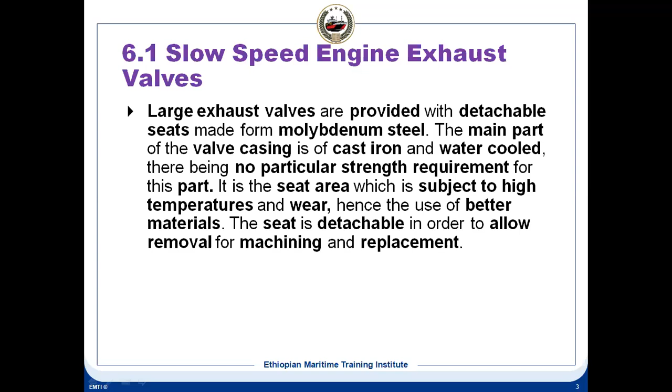Now, hydraulically, we avoid the tappet. We don't use the tappet clearance, so it is hydraulically actuated. But thermal expansion, how has it been taken care of? You see, the thermal expansion, whether you are using a hydraulically operated valve or a rocker, thermal expansion will be there because it depends on the engine operating condition. During the operation of the engine, the temperature.

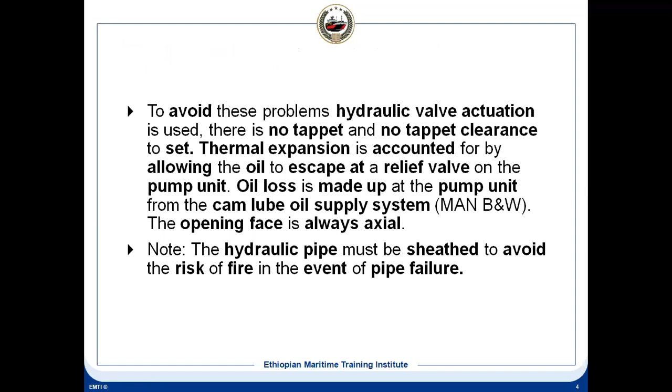Okay, so now can you hear me? There was some network problem. So let us start again. So in this case, can you see the screen? Hello, can you hear me? So can you hear me, all of you? Okay. Yes, Chief, now I can hear you. Yeah, okay.

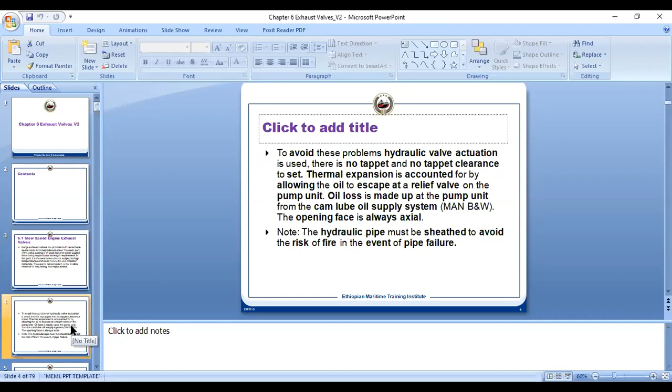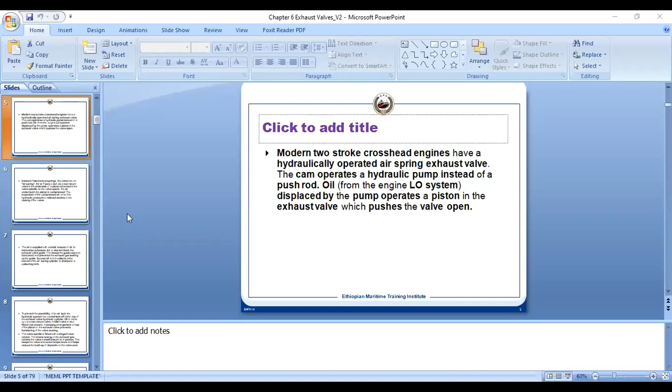Yeah, it is closed by the air spring. So there is an air piston underneath. The cylinder is filled with air, so it gives you an upward force so that it closes. So it is hydraulically opened, and by the air spring it is closed. And the air is supplied from the control air system. It's at 7 bar, and there has to be a non-return valve in the supply line so that when the valve is open and pressure is increased, it should not escape from the air cylinder.

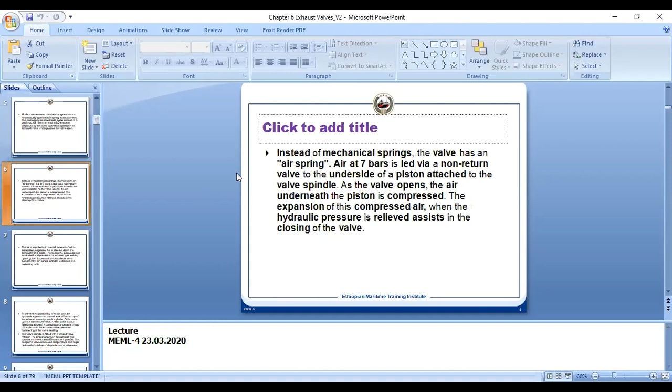Okay, can you see the screen? Exhaust valve. One of you unmute and tell me. Hello, can you see the screen? Chief, you are... no, not now. Okay. Okay, now you can see, isn't it? It's trying. It's trying. Yes. Okay. Yeah.

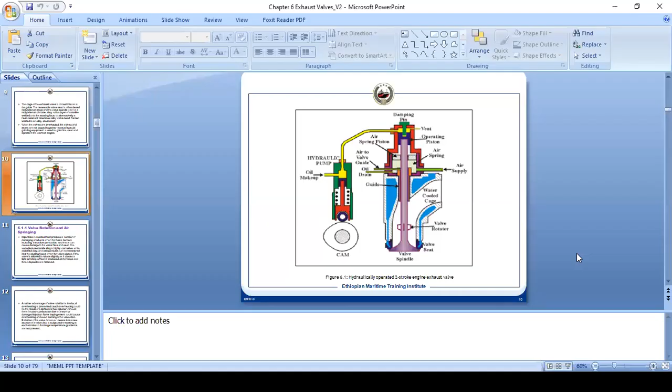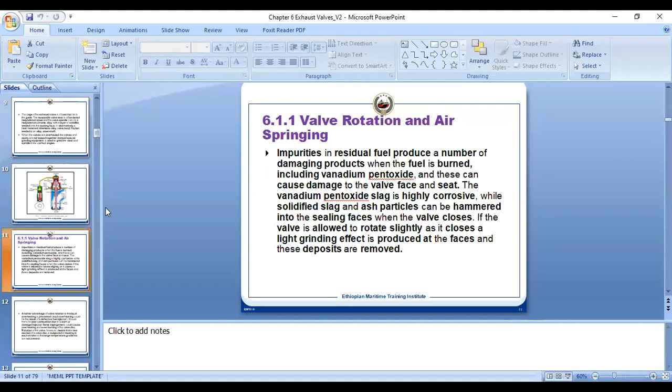I think it needs strong connection. Yeah, tell me. Yes. Hello? Yeah. Can you hear me? Tell me. Hello. Yeah. Tell me. You want to say something? Yes, Chief. The connection is very poor. It's in and out. Yeah, that is true. Let us try now. You just mute all the microphones. So

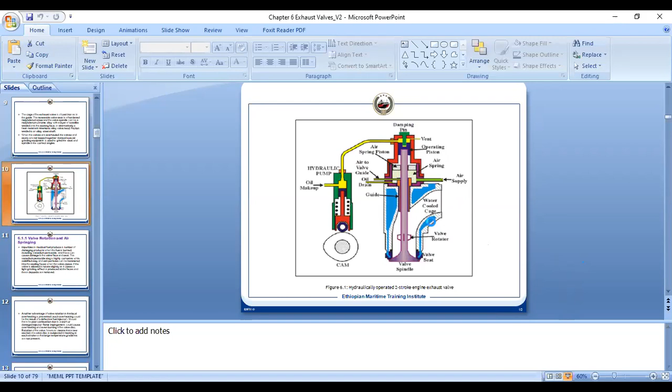In this case, why is the damping provided? Because we don't want it to close faster. If it closes faster, then it will hammer the seat, and the valve face and the seat face will be getting damaged. That's the reason we don't want it.

So here what happens: when it is opening, this damping pin is stationary. The piston, which is the blue color, is moving down. So the clearance between the damping pin and the piston will increase. Once it increases, that space will be filled up by this oil.

Once it is filled up by this oil, now during the closing, what will happen? There will be a slow rate of movement in the upward direction, because this oil has to come out from this space for closing it. So this is the reason it dampens the upward movement of the spindle.

And there is a vent on top. If any air is trapped inside the hydraulic system, it has to be removed, because otherwise there will be knocking, because the air is compressible, so it will get compressed and it will close very fast, which you don't want. And this air piston is moving in the upward direction, because underneath this air piston there is this violet color, what you see is the air cylinder.

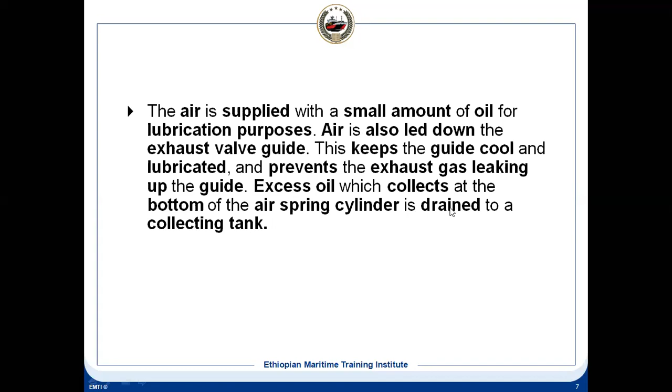So let us go to the slide, the description of it. This supplied air carries a little lubrication oil, so it gives lubrication between the exhaust valve and the guide, because there is relative motion there. It also cools; not only does the supplied air do the sealing, it does the cooling, because there is continuous flow and the inlet air temperature is less. So this is the purpose of the sealing air. And excess oil, as I told you, gets collected and drained to the collecting tank.

Now, this has also been covered. That's the airlock on top of the piston. That's why the vent is provided. Nowadays all engines have auto venting. You don't have to do it manually, as used to be done long back. Because in the hydraulic system we don't want any air, otherwise it will not work. And there should be a non-return valve, so that the high pressure does not get released.

And this is the hydraulic relief valve provided on top of the piston, so that it has the damping effect. So there is no hammering, because as the pressure increases it can release the pressure. The relief valve is not shown, but it is fitted on the pump, not the actuator. Damping is in the actuator, which I have just explained. And the wing, this is also explained. It is the same thing as written.

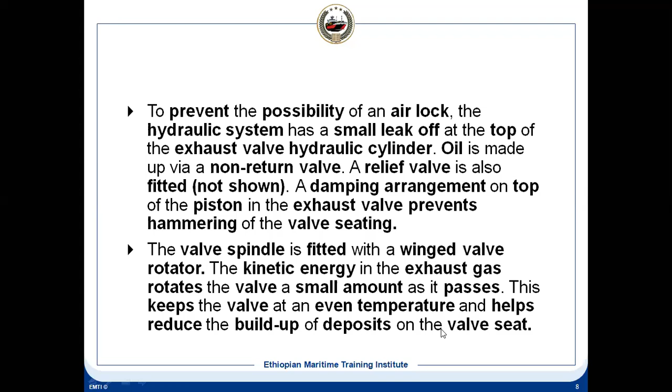Kinetic energy hits the vane and then it turns, so you have even temperature and build-up deposits will not be there in the valve seats. The cage is made of cast iron, and the guide also, because they are not subjected to adverse conditions like high temperature, high pressure, high pollution. Molybdenum steel is used for the valve seat, and for the valve spindle we use molybdenum chrome alloy, which has high temperature resistance, high corrosion resistance and high erosion resistance. It can withstand high mechanical stress also.

And you can have stellite welded on the meeting surface between the valve and the seat. This improves high corrosion resistance and high wear resistance, because exhaust passes at high velocity between the valve seat and the valve, which acts as a nozzle. So there can be erosion, because it carries many particles. So the heat resistant Nimonic alloy, 80A, which we use, is very good for that environment.

It works very good, and all the engine makers are using this alloy for the valve head. Now the valve head we make by this Nimonic alloy, but the spindle is not subjected to that adverse condition, like the valve head is. So what we do, the valve head is made of Nimonic alloy, and the spindle is made of steel. So there is friction welding.

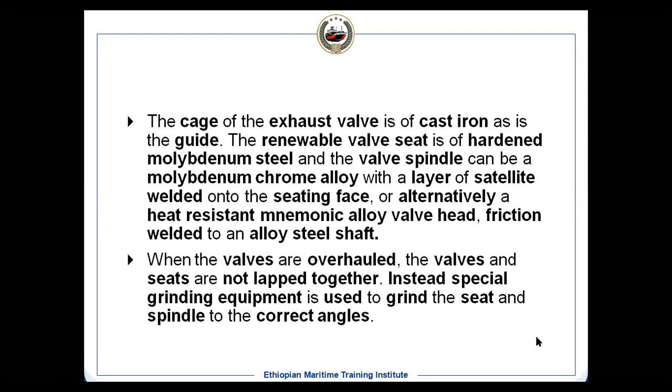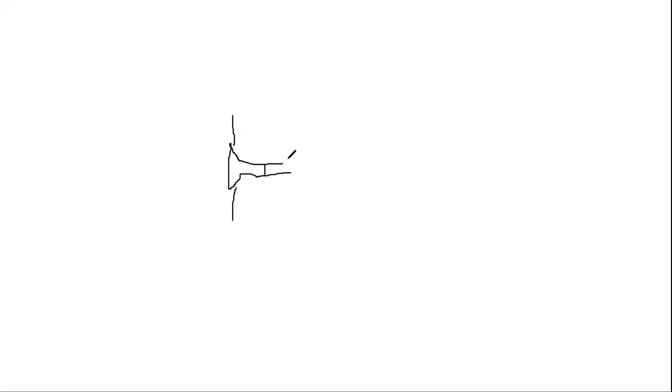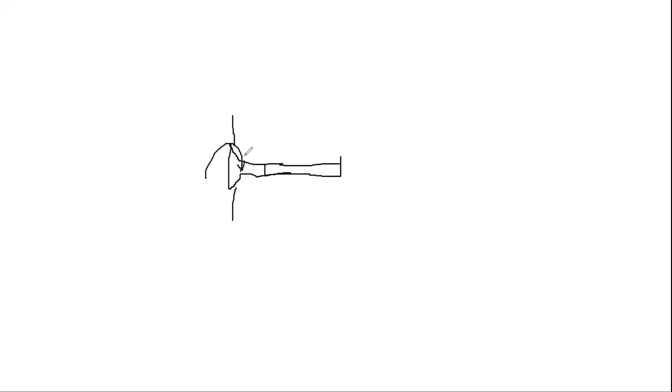How is it made? Friction welding. This is the way it is made. So this is your valve, and the valve is held in the lathe, and this valve head, for example, ends here, and then you have the spindle, which is made of steel, which is here. With the lathe the head is turned, but the spindle is not turned. The spindle is held in a vise here.

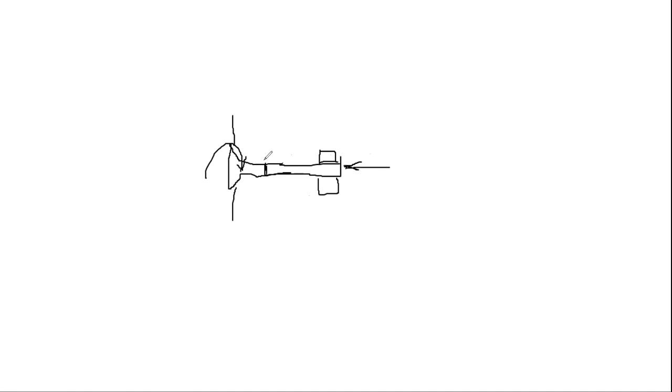But at the same time, when it is rotating, hydraulically there is a push from this side. So since it is rotating, at this surface high temperature will be generated because of the friction, because this is stationary and this is rotating. And at the same time, you are pushing it. So at high temperature there will be diffusion in this area, and it will get welded. It is called friction welding.

Special tools are used. Once it is welded here, it becomes one piece. Before doing so, it is aligned properly. It automatically gets welded because of the friction and the very high temperature it produces. In any welding we use, whether arc welding or gas welding, we increase the temperature so the metals diffuse together. Here also it is the same. Only thing, this temperature we increase by friction.

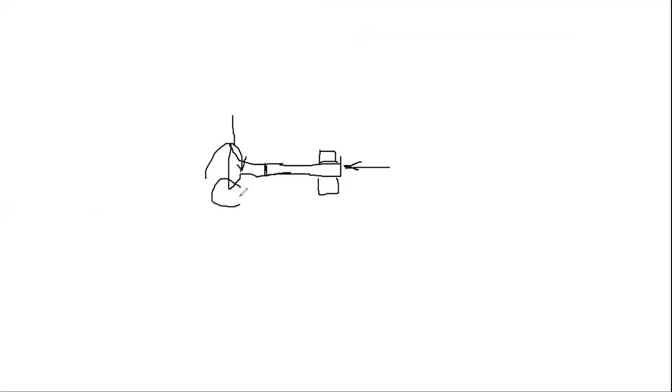Is it clear, that's how it is? So this is the way it is manufactured. And during the overhaul of the valve, be careful, because the valve and the valve seat are of different angles. The reason for this different angle is, if you see this portion, it will be like this. So the mass around this area is less than the mass around this area, so the expansion definitely will be more at the same temperature.

Are you online? One of you, I think, Hilo Michael, wants to join. Tell him to join with the password and ID.

So, okay. Is it clear? The mass of this area is less than this area. So definitely the expansion in this area will be higher than this area, though they are subject to the same temperature. So what is actually done? Suppose this is the seat. The valve angle will be different. So the valve angle and the seat, for example, these two are not parallel. If it is parallel, for example, you can lap it.

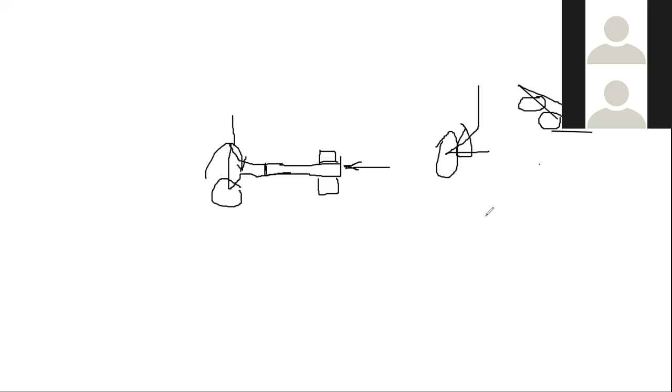Somebody's microphone is on, just put it off. And if you have a question, then put it on.

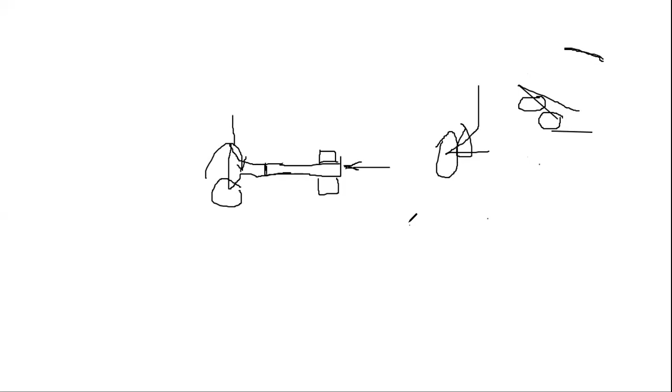So this angle is kept. That is the reason: never lap it. Check the manual whether they allow lapping or not. If the manual says yes, you can lap it, it means this angle is the same. And when you grind it, this is your valve, you fix it in the grinding tool, and there is a grinder grinding the valve. And we have the seat, which is ground here. So this is the seat.

So these two, the seat angle and the valve angle, are not the same in most cases. So don't do lapping. If you do lapping, you get the same contact face, but in operating condition this will change. When you are grinding, it is the cold condition. But in operating condition, sealing should be there. So because of the differential expansion, this angle is kept different. Is it clear?

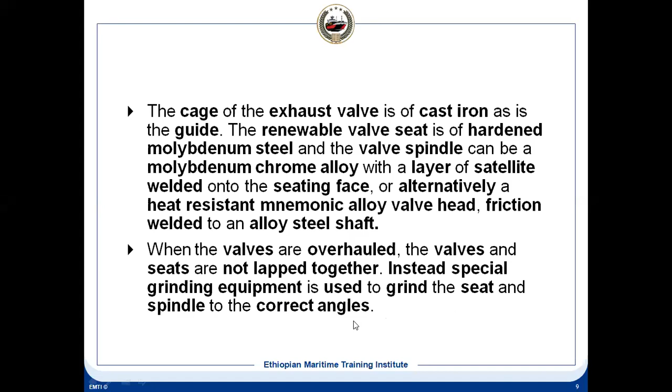Now the rotation and the air spring. So we have the rotation because there are deposits, especially vanadium. Vanadium is highly corrosive and makes deposits at high temperature. The melting point is high, but when it mixes in a 1:3 ratio with sodium vanadium, the melting point reduces, so it gets melted. Once melted, it makes a deposit which you don't want on the surface of the valve and the valve seat. That's the reason the rotation of the valve is so important for this purpose also.

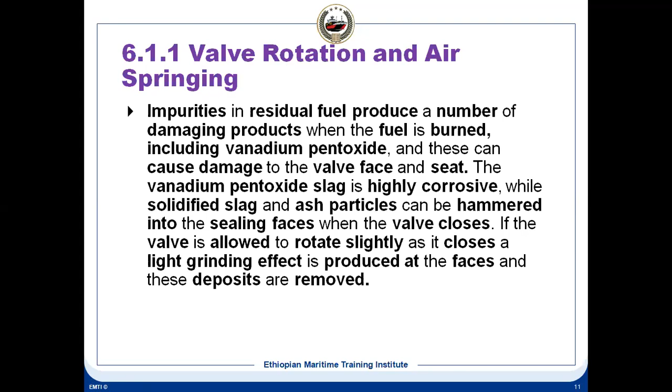And this is very highly corrosive. Once the deposit is made, it is very hard and you cannot remove it. It will damage the valve seats and it will not close properly. And once it is leaking during combustion, the flame will move through that, and then it will become a weak valve, and the valve will get damaged.

Another thing is the flame impingement, because of poor combustion, the impingement will be there on the valve. If the valve does not rotate, this impingement will be at the same place, and it will become weak and get damaged. That's why, especially from poor combustion, the impingement will be there.

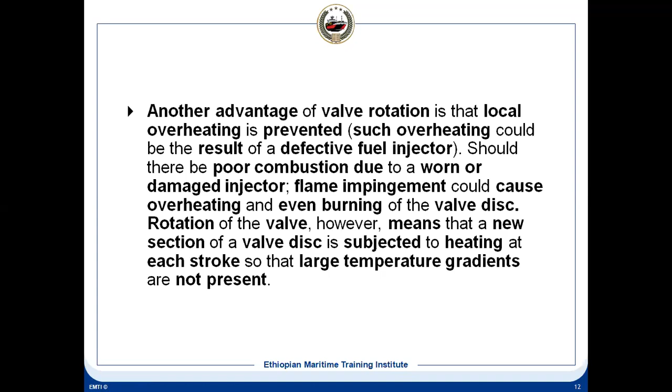And if the fuel injector is defective, the penetration will be high, it will impinge on the valve and it will get damaged. If it is rotating, it will not be impinged at the same point, it will keep on changing position. So this is the purpose of valve rotation, so the temperature gradient will be equal and deformation will not be there. It will equally expand, so the sealing will be proper.

And the air spring, as already explained, closes as it gets compressed and then it closes. And then also, the check rod is provided.

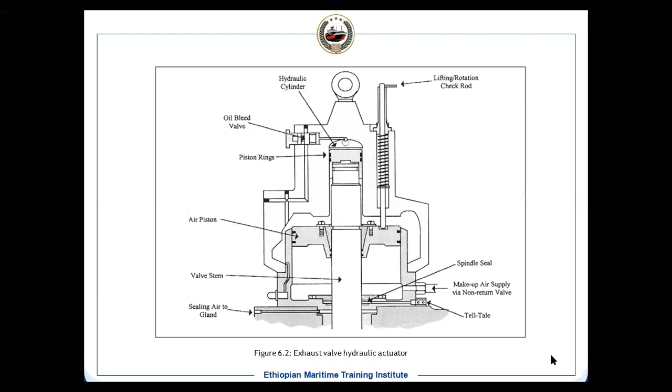Suppose we have this air piston. If you see from top, now there will be a slot. This slot is not all around, it will be around this. In that diagram, the check rod is in the slot. Now once this is rotating, what will happen? This check rod will come out from this slot and rest on this surface that is slightly above the slot. By seeing that, you can make out whether it is turning or not.

What we can do to know exactly whether it is turning or not: suppose this is your check rod, and there is a tube. In this tube, the check rod moves up and down, and this tube has got a slot. We can mark at the lowest position. When the check rod is at the lowest position, we mark with the marker on this tube. Once it has come out from this slot, what will happen? This check rod's position will be slightly higher. So by doing this marking, you can make out that it is turning.

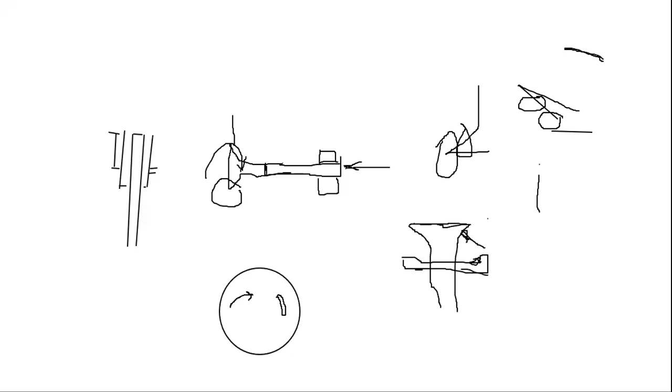How you can make out that it is rotating or not while in operation - this exercise you need to do during the operation of the engine.

Now there is an oil bleed valve. This oil bleed valve, if you see, is at the top of the cylinder. So any air getting accumulated at the top should move out from this. So what we do is bleed some oil, a very little quantity, to check whether there is air or not.

So tell me, Fatene, tell me. Okay, it's very good. What about if we see the working condition?

And this you can disengage - you lift it and turn it 45 degrees and it will get disengaged, and you can lock it on this tube, on top of the tube. So this tool is the purpose for this check rod. This check rod's name itself is checking something - what is checked? It checks that the valve is opening and closing, as well as that the valve is rotating. Is it clear, Fatane? Yes, clear, clear.

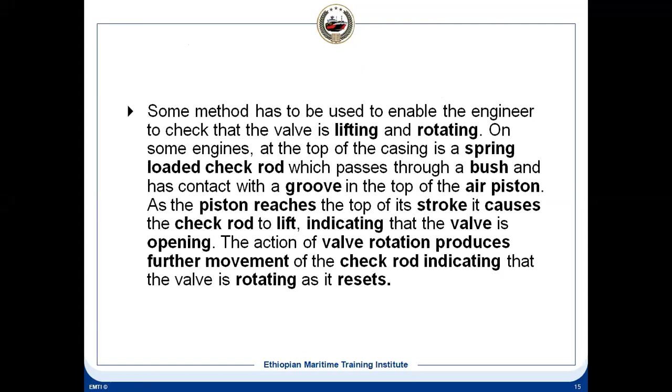For the Sulzer engine, how does it work? How do you check actually? In the Sulzer engine, there is a sight glass on the exhaust valve, and through that sight glass you can see the piston moving up and down, as well as a marking on the piston, so you can see if it is turning or not. Because like the valve rotator for the four-stroke engine, how do you check? You put a paint mark, isn't it? So you know that point is rotating.

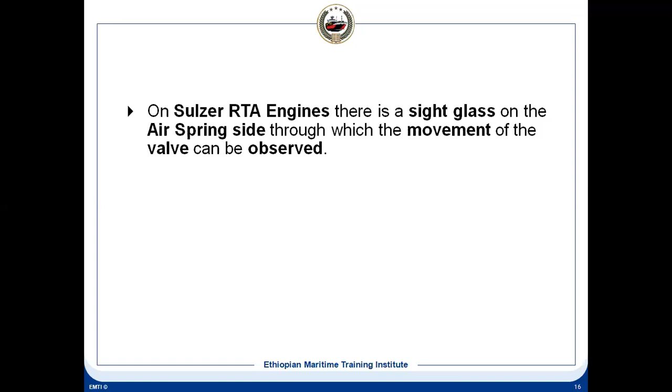Here also at the side of the air piston, there is a marking, by which you can check whether the valve is rotating or not. But modern, intelligent engines don't have this. They have a sensor, by which they can check that it is opening and closing. They even check how much it is open, the valve lift and rotation also, through the sensor.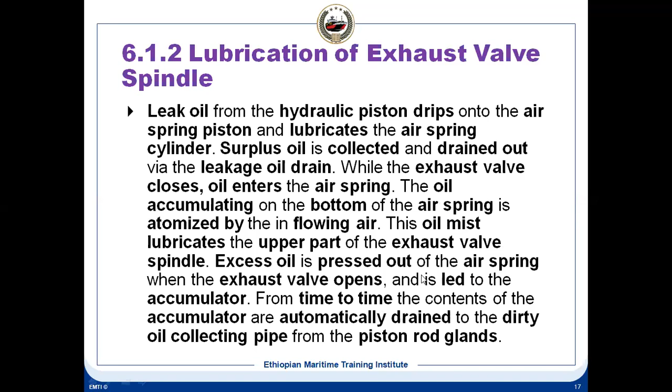The lubrication here, I already explained to you in the air spring cylinder. It is the same explanation. The bottom part of your exhaust valve spindle, the top part, is lubricated. The spindle surface is adhered with oil and it enters into the top part of the bush, and then it is lubricated.

The bottom part, what happens? The cylinder lubrication which is injected does not get burnt out completely. That portion which is not burnt out moves away and comes out from the cylinder with the exhaust, and that oil gets stuck onto the surface of the valve spindle. When it is moving upward, that goes inside. So any relative motion, whether downward or upward, gets lubricated. The lower part is lubricated like this.

But the exhaust will not enter, only the lube oil which adheres on the surface of the spindle will enter. We have already studied lubrication in bearings - one of the types is boundary lubrication. That is the first layer, which, because of the surface asperity, will be on the spindle. It will adhere and give lubrication between the valve spindle and the valve guide.

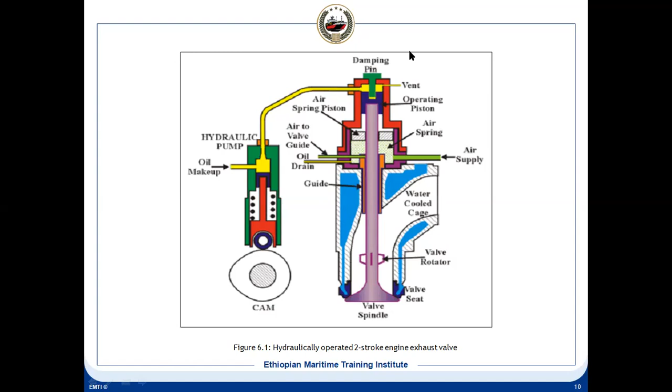So this is the bottom part of the spindle and the bush lubrication.

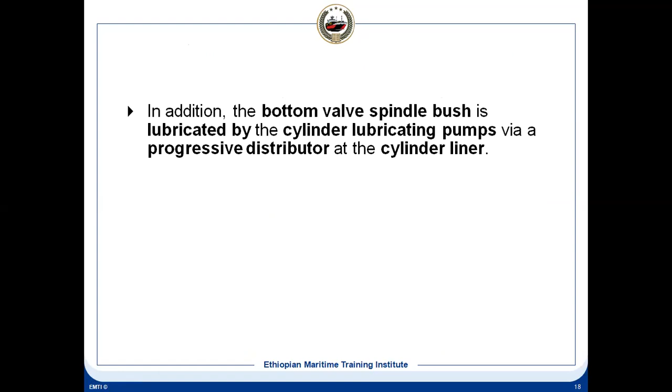Is it any questions on exhaust valve? And there is certain explanation.

Because next is the relief valve. Any questions? Chief, yeah, this is Haptu.

Maybe I didn't follow if you said before, but can you please explain about valve drop? Valve drop - what did you mean by valve drop? In the assignment, there was a question about the valve drop. That is okay, this assignment you are talking about.

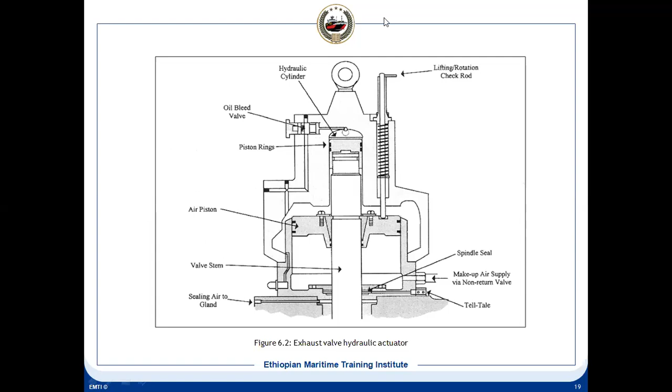If not, then let us go to the next, that is the relief valve. Why do you have the relief valve? It releases the excess pressure from the cylinder. If we don't release the excess pressure, what will happen? The component has got a design capacity, strength which cannot exceed, so the component will be damaged. It can be cylinder liner, it can be piston crown, it can be cylinder head, exhaust valve which is exposed to part of the cylinder head can be damaged. So to avoid this damage, the pressure should be released.

That's the reason we have the relief valve. And this is a normal spring-loaded relief valve, and it is made of stainless steel because it is exposed to high corrosion, high temperature, high pressure. So it has to withstand those. So it is stainless steel, and it has a mitre seat. Means it is inclined.

It is when it seats, the valve seat and the valve. So this is at an angle, so it is called a mitre seat. So this is the valve. Suppose this is our valve and this is the valve seat. So when it is at an angle, it is called a mitre seat. Nothing else. It's called a mitre seat.

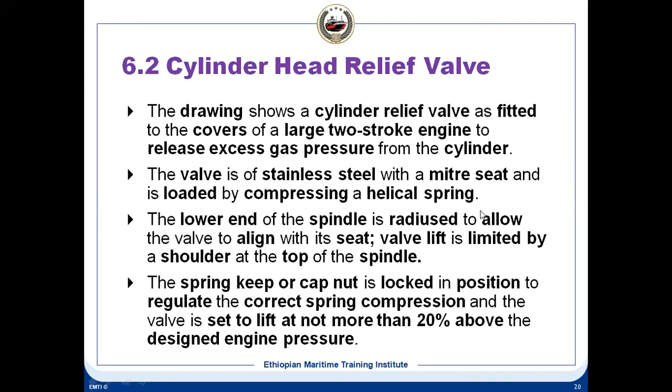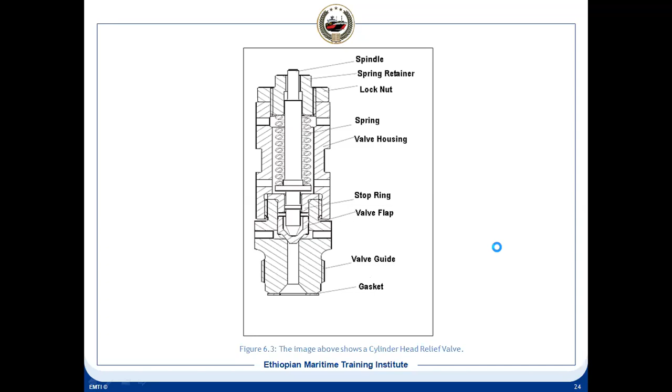So gas as well as liquid can be released, but not many engines have that. In that engine, there is a soft iron gasket between the cylinder head and the liner top, and that gasket will not get damaged. But in other engines not designed for that, containing the relief valve, that gasket might get damaged. So how to avoid that situation? Suppose you have a relief valve and that arrangement is not there. What do you do? During slow turning before starting, that is the reason the blow through is done. We keep the indicator cocks open, and it expels any leakage.

Because in what situation can water accumulate into the cylinder? When the engine is not running. When the engine is running, water will not get accumulated. There can be water going inside, but that water will get evaporated. And when its pressure is higher than the expansion tank, the gas will leak to the expansion tank, not the water will enter. Whatever water enters, maybe during the suction, will get evaporated because of the high temperature. So that's the reason. This is the precaution we take so that situation does not occur.

And there are certain cases when the relief valve can be lifted. In what situations can it lift? During the maneuvering. Why during the maneuvering? During the maneuvering, it is at slow speed. Maybe oil is not atomized properly because of low load, as well as there can be leakage of oil from the injector which can accumulate, and then it can have a violent fire. Once there is a violent fire, the pressure will be very high and it will lift the relief valve. After that, it will become normal again.

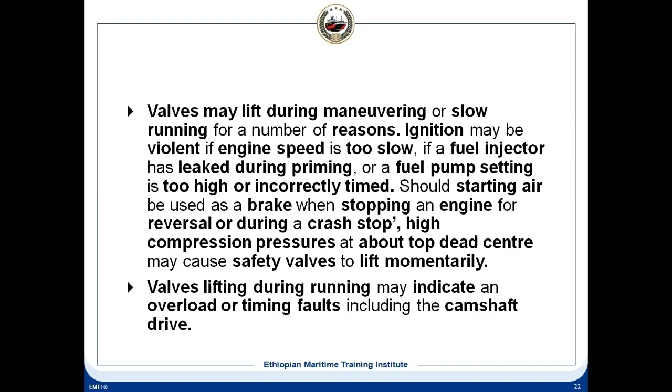Is it clear what I said just now? Any questions?

Okay. So the one I was talking about releases the excess gas pressure. It is designed for that, not for the liquid. So in the event of cooling water or oil, that is the reason before starting, blow through has to be done, so that it does not damage the cylinder component.

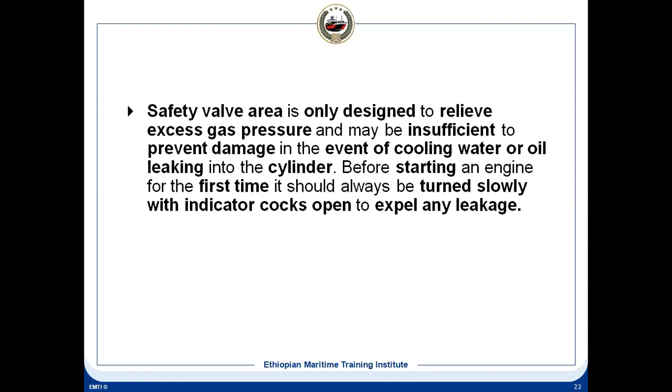Now another component in this chapter, that is the cylinder head. All engines, any makers, use this type of cylinder head. We have a central bore to accommodate the exhaust valve, and this cylinder head is cooled by bore cooling. Bore cooling we have seen already in the cylinder liner chapter. Bore cooling is very effective and it can reach very close to the inside surface, where the high temperature is exposed, so that maximum heat can be removed and the temperature can be maintained. The cylinder head also uses bore cooling.

And there are holes at the periphery. Those are the holding down bolts, the elastic bolts by which the cylinder head is secured onto the cylinder block. And these two bolts shown are for securing your exhaust valve. And there are pockets for the fuel valve as well as the relief valve and air starting valve, and so on.

Sometimes the relief valve and the indicator cock are assembled together. What is the reason? Because when we make a hole in the cylinder head, it becomes weak. Instead of making two holes, one for the indicator cock and one for the relief valve, we use the same passage and put both the relief valve and the indicator cock. The relief valve will be first and then the indicator cock, because the relief valve should not be blocked. It should be subjected to the cylinder pressure.

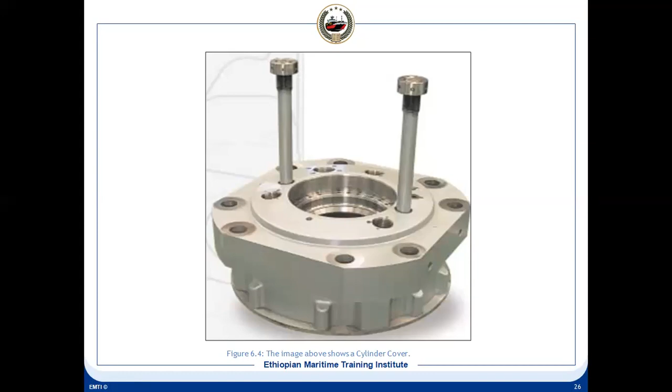So this is the cylinder head we use. In the center we put the exhaust valve because we get the benefit of scavenging, which is more important. The center is the best location for the fuel valve, but we make the compromise. And for that compromise, in the two-stroke engine we have to use more than one injector, two or three depending on the size of the engine. Larger engines use three, smaller ones two. But we cannot use one, because the oil will not be distributed uniformly throughout the combustion chamber. That is the reason we use more than one.

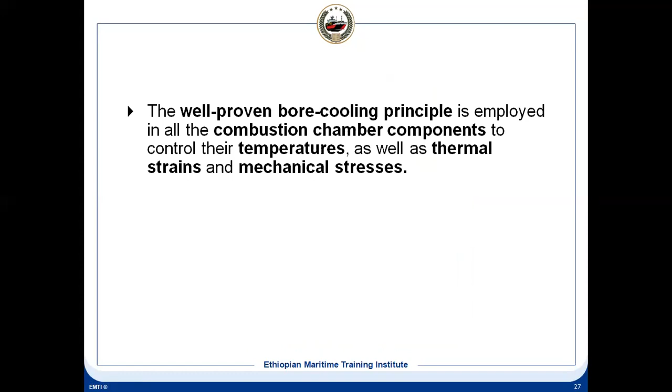So this is the bore cooling I told you about, it is the same. So the thermal stress and the mechanical stress we can maintain within the design limit. And what is the material, how is it produced? It is forged steel. Forging is done, and the bores for bore cooling are made.

And sometimes for this exhaust valve we use Nimonic 80A. This is the best material developed for the exhaust valve to work in that environment. And for example, these two engines, RTA 68T and 58T, use three injectors. So it means there will be fuel injector pockets; three pockets will be there.

And then the 48 is smaller in diameter, so it uses two fuel injectors, so that the distribution of the oil is uniform, symmetrical.

Anti-corrosion cladding. What is this? Sometimes you'll see, around the injector nozzle which is coming out from the cylinder head, that area has a cladding. A different material is used. It is purposely done. It is not that the cylinder head was repaired. It is not a repair, it is the design. So this cladding is done.

Why? Because that area is subjected to very high corrosion. So it helps us. This cladding material has got anti-corrosion property, meaning it can withstand the high corrosion. So that is the reason for the cladding. For the cladding, look at your cylinder head. So the cylinder head is this one, and this internal surface is the combustion chamber.

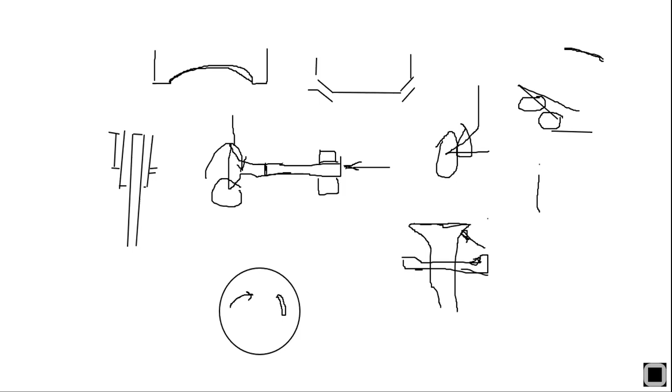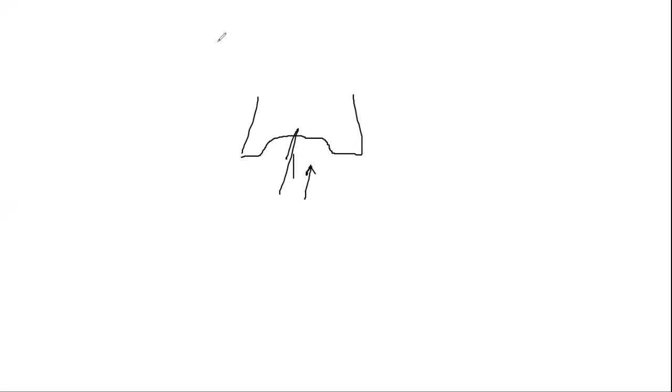So this is the cylinder head, and this side is the combustion chamber. If you see it from this direction, we'll see two circles, one circle and another circle. And suppose we have three nozzles penetrating. So the cladding will be in this area.

And it is purposely done. Is it clear? Understood? This is if you see the cylinder head from the bottom. So this is a different material because it is subjected to a high corrosion area, a highly corrosive atmosphere.

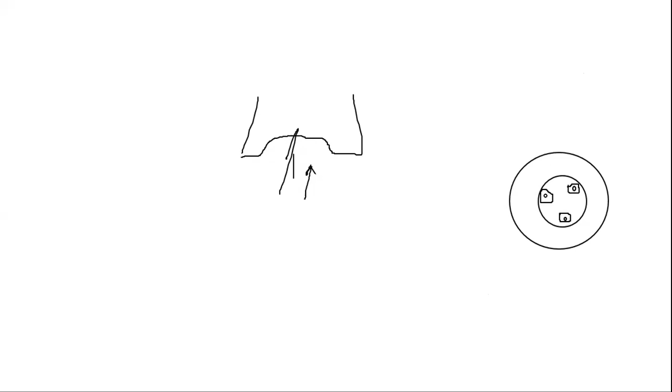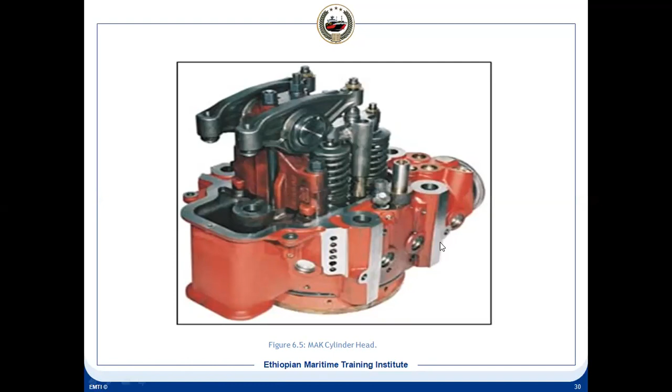And the tappet clearance, why do you need tappet clearance? Tappet clearance is required for the thermal expansion of the valve stem. When thermal expansion takes place, it has to allow that expansion. That's the reason we take and maintain the tappet clearance. Now, when we take the tappet clearance, we need to follow the maker's manual.

It provides the information. Now tell me, what information do you take from the manual regarding the tappet clearance when you take it? Who wants to give the answer? Yes, Chief. Yeah, tell me, Abraham. So from the manual, we can see how much the tappet clearance must be, and in which condition, in cold engine state. For the intake valve, how much it must be, and for the exhaust valve, the clearance is described. Okay, yeah, that is the condition as well as how much it is.

Condition means which condition are you mentioning? You mentioned the engine, isn't it? Hot and cold. Yeah, yes. Any other information, which all of you have done, that the manual gives? Any other information? Chief, it also tells... Yeah, tell me.

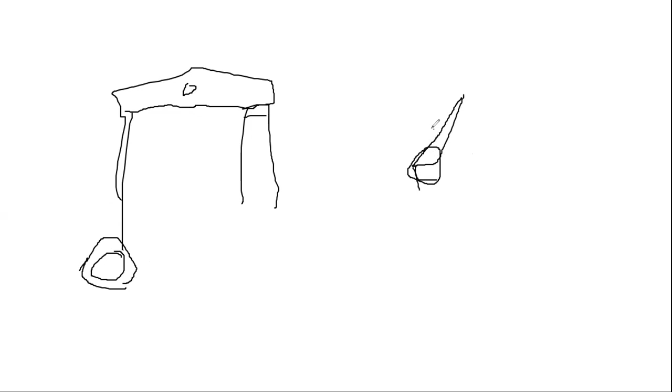So there will be shock loading here. The load will not be constant. The load will increase once it is coming out from the base circle onto the flank. But in this case, where there was load here, there was no load here. So there will be a shock load.

Now, what has been done, one way, if you see the slide, let me go to the slide: we use a hydraulic system. It is not the hydraulic system we have for the two-stroke engine, the hydraulic tappet. It is a self-adjusting hydraulic tappet. How is it done? It is done this way.

So suppose you have the push rod. This is the push rod, and this is the follower and the guide. Many four-stroke engines use this. And you have the follower.

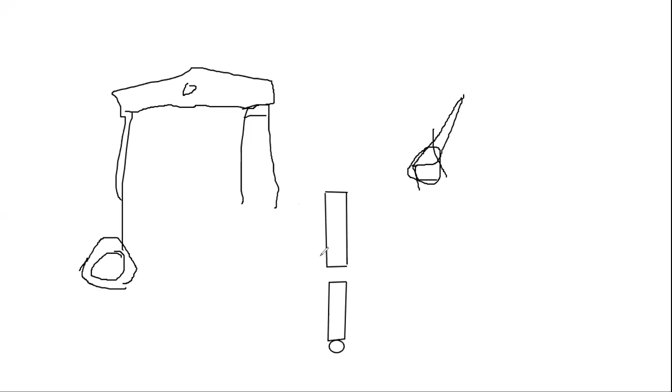So here, what you have, this space, these two components are not directly connected. This space is filled with oil. So this oil actually pushes. Oil is incompressible. When this is moving up, this also moves because of the oil.

Now in this case, what will happen? You have the rocker arm, and whatever may be the clearance here, it will be automatically adjusted because this oil volume can be maintained as per this clearance. So this oil volume is not necessarily the same. This distance changes depending on how much oil enters, because as long as there is a clearance here, oil will enter.

Suppose there is no clearance, oil volume will be same. Suppose the clearance increases, what will happen to this oil volume? If this clearance increases, oil volume will increase or reduce to adjust at that time.

Hello, Chief. Have you got my question? Reduce? Yes, yes, yes. It will reduce or increase.

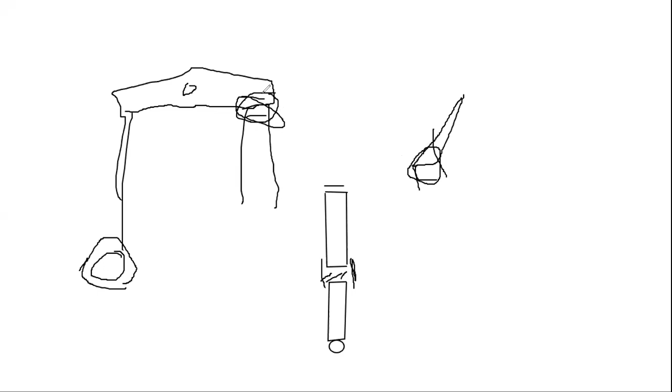If the tappet clearance increases, there is a clearance here, the amount of oil will be increased.

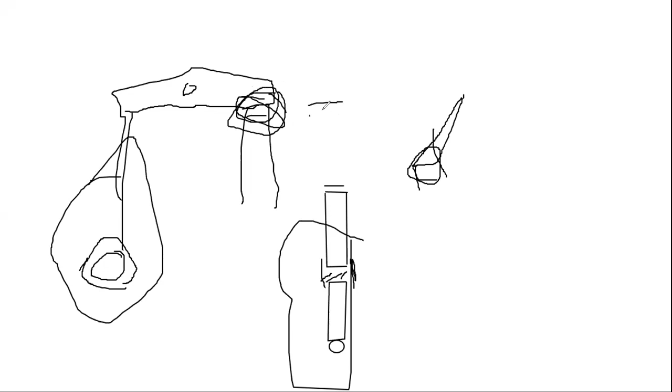Now this portion, the oil I have drawn, is here, this side, and the clearance is here, tappet is here. Now suppose there is a tappet clearance. Now this clearance has to be adjusted. It means the rocker arm should touch here. This should be on the same line.

Now here, this is the adjustment. So this distance will increase or decrease. Once it increases, it means the opposite side, the volume of oil supply, will occupy more volume of oil.

And then when it is moving up, there are ports. This system is covered in one of the chapters, I'll go into details there. So when it is moving, this volume can be adjusted based on this clearance. If the clearance is more, volume will increase; if the clearance is less, volume will reduce. Understood? That is one way to solve this tappet problem.

So if the tappet clearance is insufficient, the valve will not close properly. There will be consequences if the valve does not close properly.

Will answer. Yes, if the valve is not correctly closed, the exhaust valve is leaking, and exhaust valve will leak, there will be power loss.

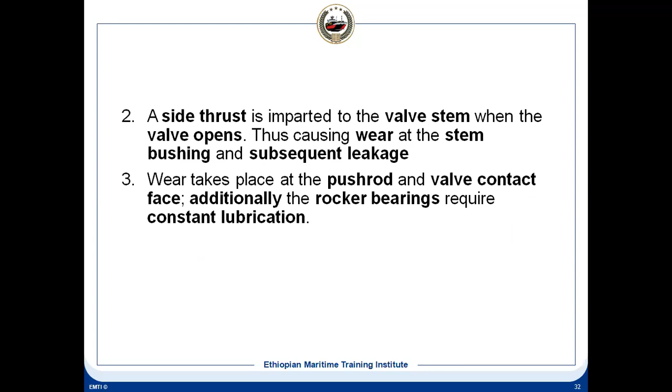Now tell me, any question till now? Any of you, any question till now?

Now, when we overhaul the cylinder head, the guide bush or the spindle, we check the clearance, isn't it? So how does this clearance increase? What can be the reason?

That bush clearance is important, isn't it? And there is a limit, we need to change the bush. But your valve is moving up and down. How come the bush is getting worn out?

Who will answer? Hello, tell me, Chief. It's because of carbon entering between the spindle and the bush, because of carbon deposit. There will be carbon between the spindle and the bush.

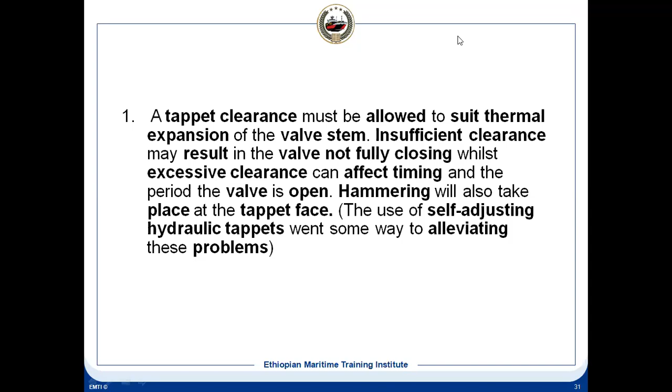Any other reason? You are both right. But apart from abrasive wear, any other reason? Gas leaking, Chief. If the valve is not closing properly, there will be gas leakage, and this will minimize the clearance.

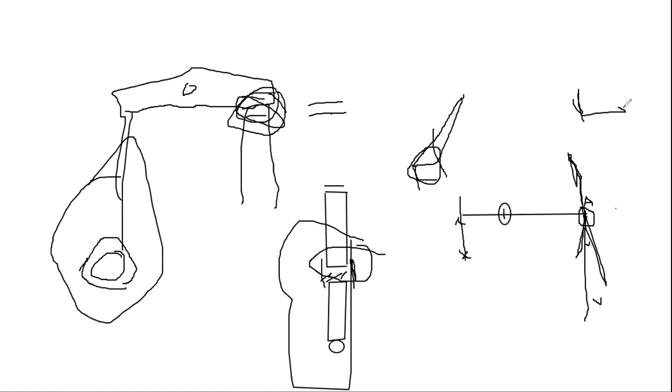And who takes this side thrust? This is suppose X, and this is Y. So who will take the X component? It is taken by the bush.

So this is for the rocker arm design, this is one of the very important aspects. This will go in details because it is there in your syllabus. Next class we will go in details. Is it clear what I said?

Have you understood what I said? Because this is moving like this. This distance is same, this distance and this distance. It will take a curve now, and because of this, there will be a side component, X component.

Y component is used for opening and closing the valve. X component, when it is opening, there will be X component which will be taken by this bush, and the bush gets worn out. There are other reasons that abrasive wear will be there, because of that reason also it will be there. But the design is made in such a way so this X component is minimal. We are not interested in the X component, we are interested in the Y component.